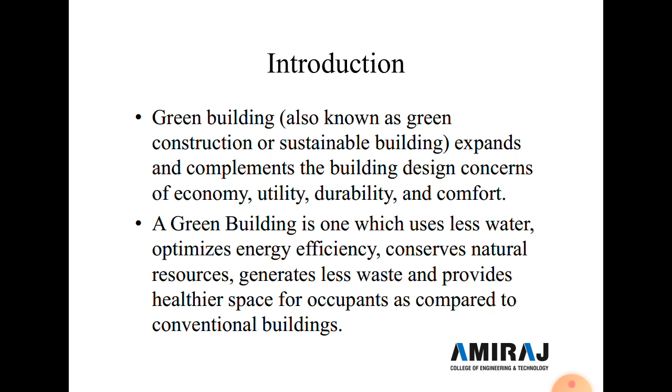As you know, different natural resources are available, like sunlight, wind energy, and water energy. All these energies are used, and we construct a building with minimum energy, using natural energy. This type of constructed building is known as a green building. In construction of the green building, wastage is much less as compared to conventional building. Conventional buildings are made of cement, sand, aggregate, steel - these materials are generally used, but as compared to green building, wastage is much more. Now next is the objective of the green building.

First objective is low impact - it minimizes the impact on the natural environment. Second objective of a green building is energy efficient, reducing energy usage and water usage. These are the two main important things. We use sunlight as a natural energy resource, and we use wind as an energy resource, which reduces the use of this energy, and water usage is also reduced.

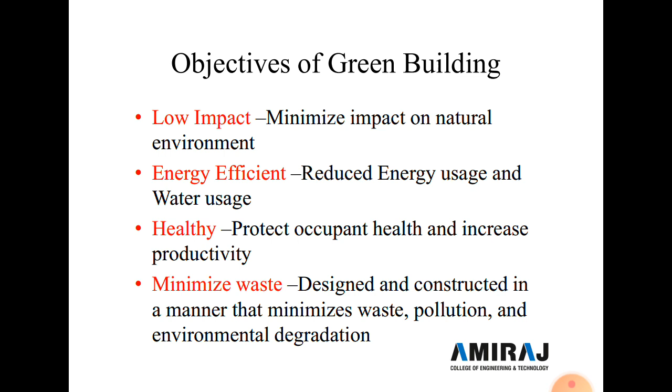Third objective of the green building is healthy - it protects occupant health and increases productivity. In construction of the green building, we use naturally available material, or another healthy material, so a healthy environment is created, which increases productivity. Fourth objective is minimize wastage. Design and construction is done in a manner that minimizes waste, pollution and environment degradation.

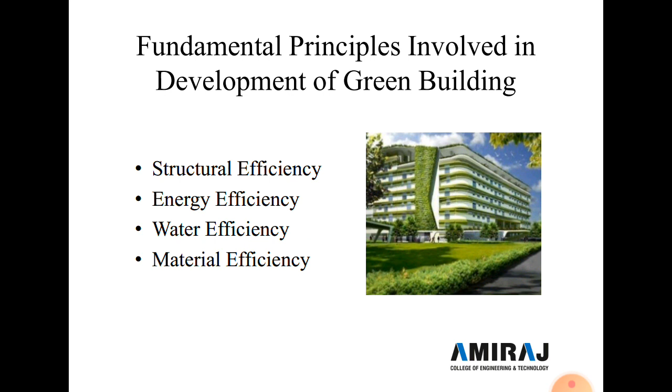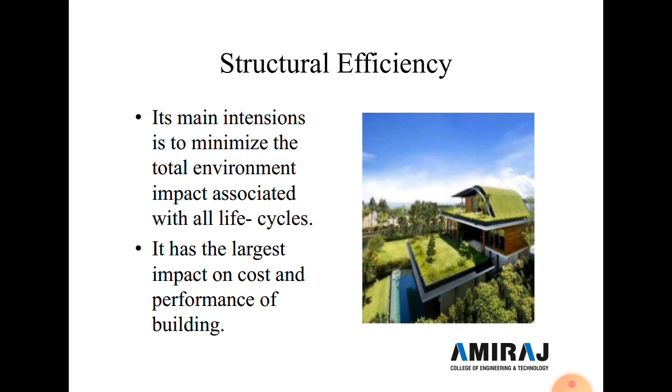Next is the fundamental principles involved in development of green building. Four main principles are involved: structural efficiency, energy efficiency, water efficiency, and material efficiency. First is structural efficiency - the intention is to minimize the total environmental impact associated with the life cycle, such as reuse and waste generated. This has the largest impact on cost and performance of the building. Green building cost is higher, but output is very good as compared to conventional building.

Second is energy efficiency. The strategy is to reduce operating energy usage. As compared to electricity, if we use naturally available energy like sunlight or wind, we can generate power, and this power is used in our building - this is energy efficiency. Renewable energy through solar power, wind power, biomass and hydropower can significantly reduce the environmental impact of a building.

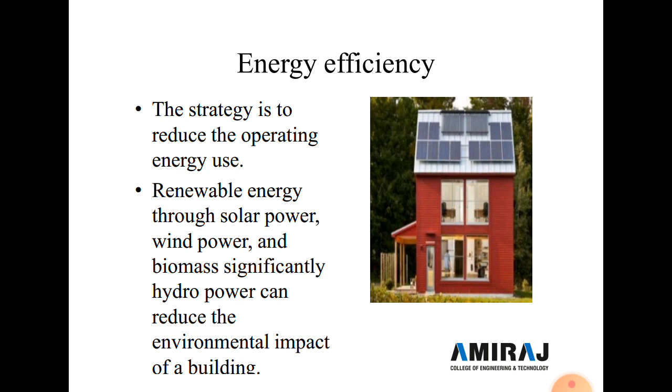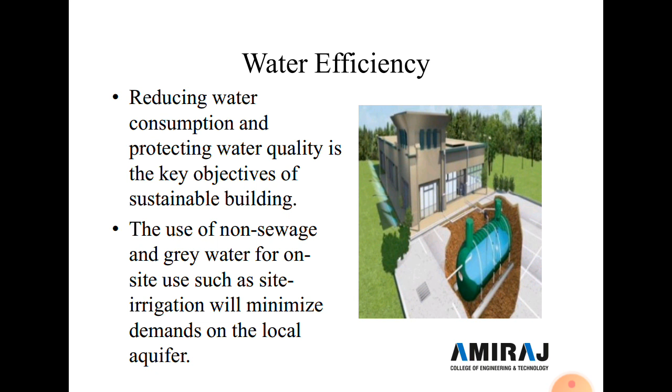Next is water efficiency. Reducing water consumption and protecting water quality is the key objective of sustainable or green building. We use natural available or stored water, reducing water consumption, and the use of non-sewage and grey water for on-site use such as site irrigation will minimize the demand on local aquifers.

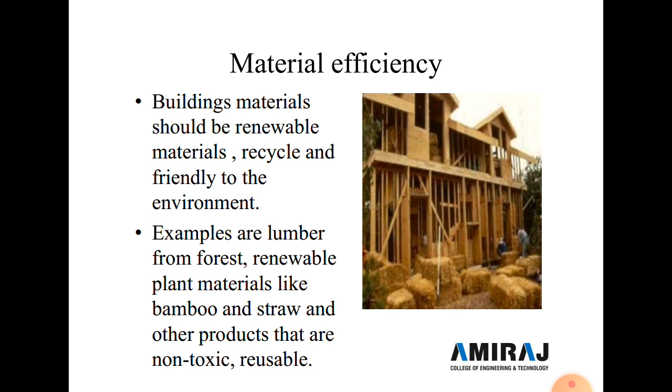Fourth is material efficiency. Building materials should be renewable, recyclable, and friendly to the environment. Examples include forest renewable plant material like bamboo and straw, and other products that are non-toxic and reusable. These different materials are easily available in India and used to construct a material efficient building.

So here it's generally used for the external wall to resist the cold and wet condition. So here these bricks cost is some of the cost is higher as compared to clay brick.

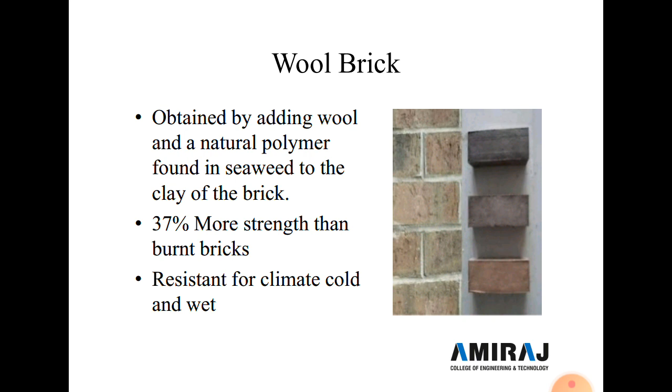Now next is sustainable concrete. This concrete is made by cements and aggregate, but using crushed glass and wood chips or slag, a byproduct of steel manufacturing, and reducing the emission of CO2. So these are the main benefits of sustainable concrete or green concrete.

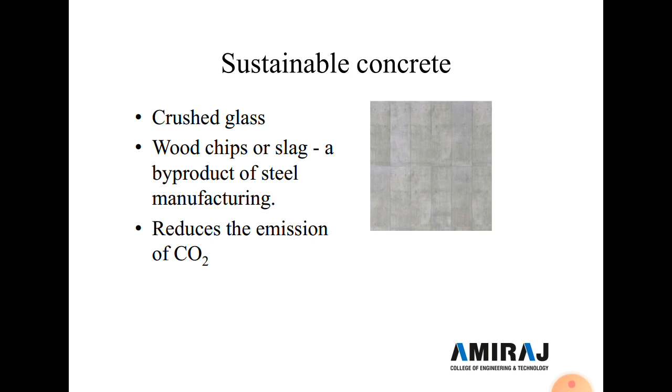Now the third one is solar tiles. See this photograph. In this photograph you see the clay tiles, and these tiles are fixed on top of the slab or roof, and exist to protect the building, and the large tile portion absorbs the day energy from the sun. So here sunlight is absorbed by the solar tiles, and we use the sunlight in daytime.

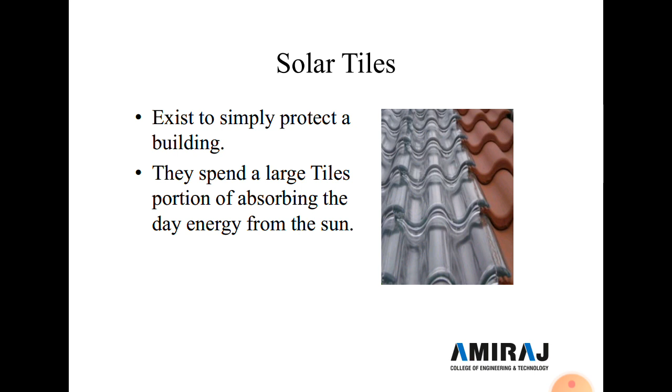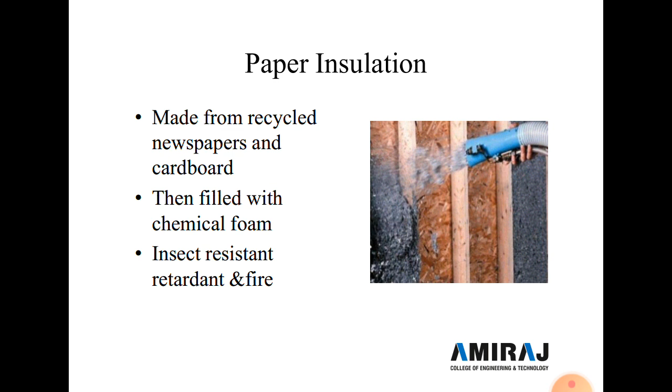Now another material is the triple-glazed window. See this photograph. Here glass window is provided. This is a super efficient window that stops heat from entering the building while allowing sunlight through. So heat is not transmitted, only light is transmitted from the glass. This type of glass is generally used in commercial complex buildings or malls etc., to reduce the usage of electric energy. So in the morning or daytime we use the sunlight, but heat is not entered, only light is entered from the glass.

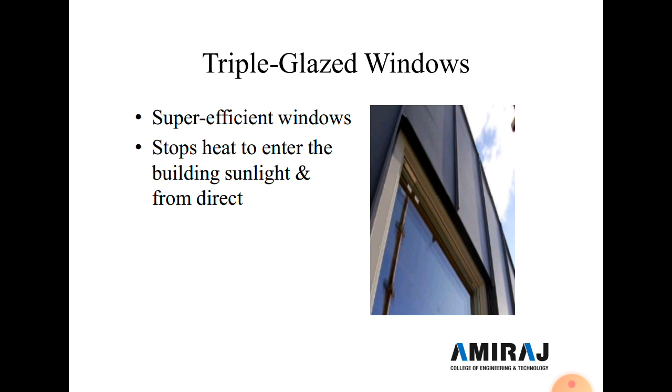Now another material is eco-friendly material like bamboo. Bamboo is used in brickwork, like see this photograph. In this photograph vertical steel is replaced by bamboo. This vertical rod is replaced by bamboo because bamboo is a naturally available material and it's an eco-friendly material, and its strength is very good as compared to other materials. So steel is replaced by bamboo. See this photograph. In this photograph we see the bamboos, and these bamboos are used as reinforcement in brickwork structure, earthquake resistant brickwork.

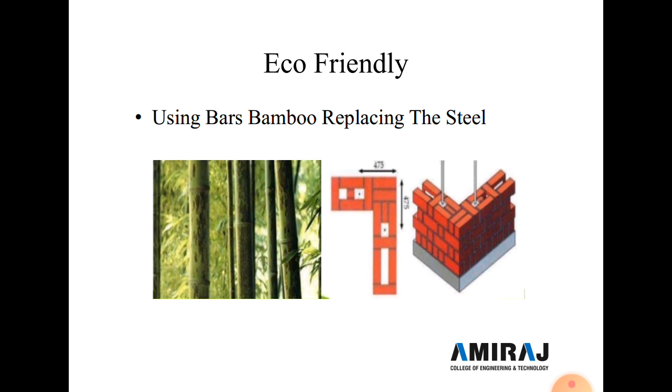Now next is how green buildings are different from other buildings. Some points are given here. The design, maintenance and construction of the building have a tremendous effect on our environment and natural resources. Green building is different from other buildings because it uses a minimum amount of non-renewable energy and produces minimal pollution, and increases the comfort, health and safety of the people who work in them. It also minimizes wastage in construction by recovering material and reusing or recycling them. Generally green building is constructed by recycled material, like waste and other recycled material, and also constructed by naturally available material.

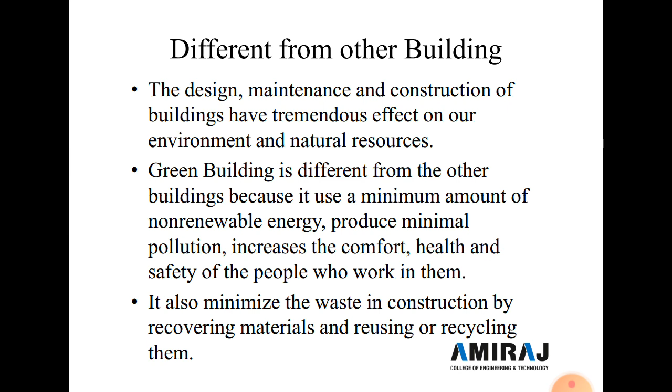Now benefits of green building. Buildings have a large effect on environment, human health and economy, and the successful adoption of green building development can maximize both the economic and environmental performance of the building.

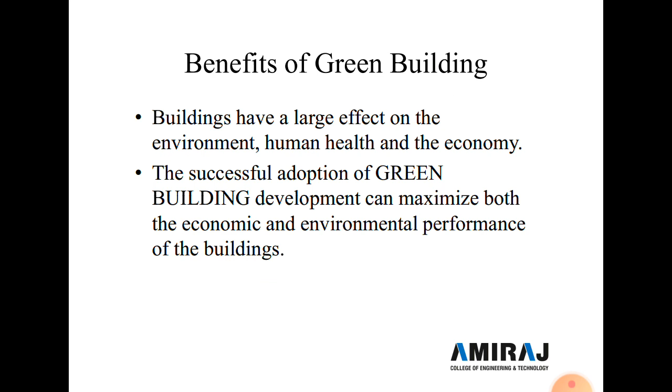Now environmental benefits, four benefits are given. First is protect biodiversity and ecosystem. Second is improve air and water quality. Third one is reduce the waste stream, as we discussed in the last slide about reducing wastage of material. Fourth one is conserve natural resources, so we use sunlight or wind energy. All these energies are used in a green building.

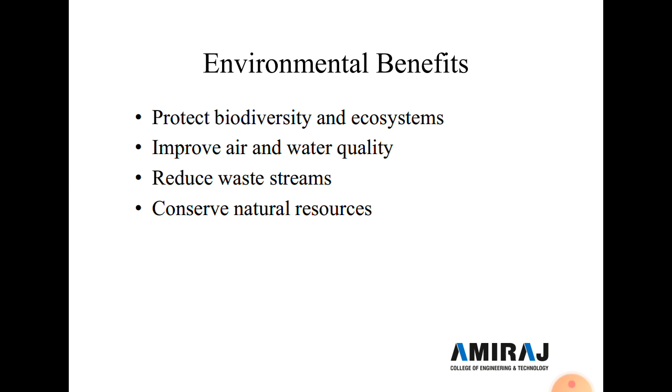Now one by one we discuss. First is economic benefit: reduce the operating cost. Second is create, expand and shape markets for green building products and services, and improve occupant productivity.

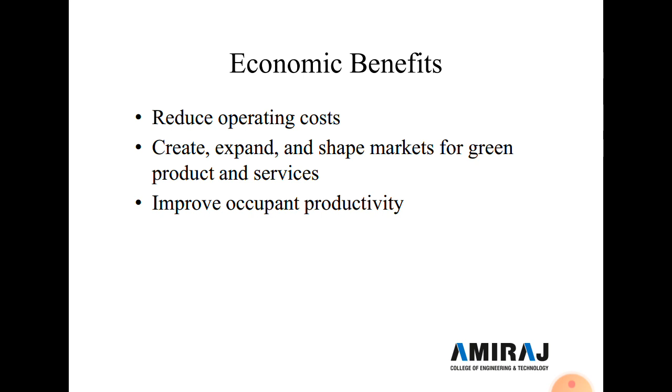Now second benefit is social benefit. Social benefit of green building is enhance occupant comfort and health. Second is heighten aesthetic quality, and third one is minimize strain on local infrastructure, and fourth one is improve overall quality of life.

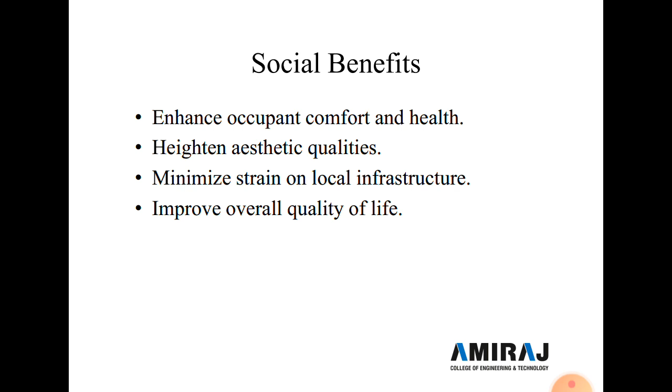Now some government agencies are given: LEED, GRIHA, TERI, ADaRSH and MNRE. These are the 5 companies or government agencies that work on green building. And green building policy codes: National Building Code called NBC, by the Bureau of Indian Standard BIS; second is the Energy Conservation Building Code, ECBC, by the Bureau of Energy Efficiency, BEE; and third green building policy code is EIA, Environmental Impact Assessment, under the Ministry of Environment and Forest, MoFE.

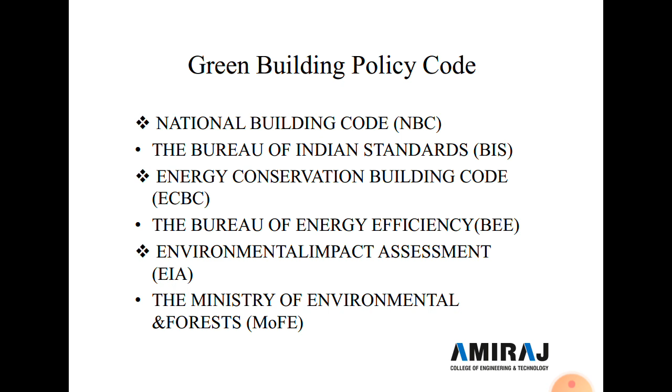So here we complete our topic of green building. Thank you.